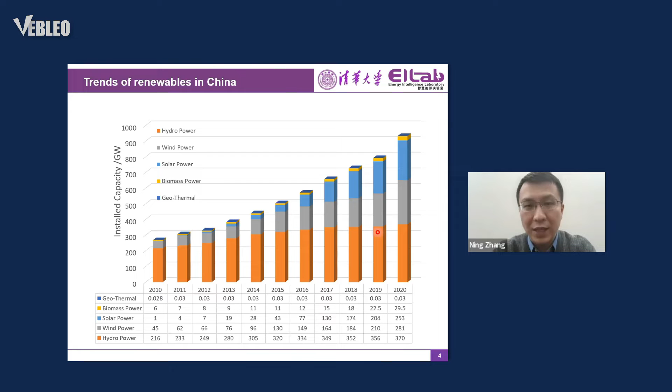And this is not the end. This is just the beginning of the development of renewable energy. We can see currently in China, about 1/3 of the electricity is produced by renewable energy. Among them, only 1/3 of the renewable energy is from wind power and solar. But this percentage will be increased to more than 45% by 2030, and to more than 70% in 2040. So the rapid growth in renewable energy brings a lot of challenges.

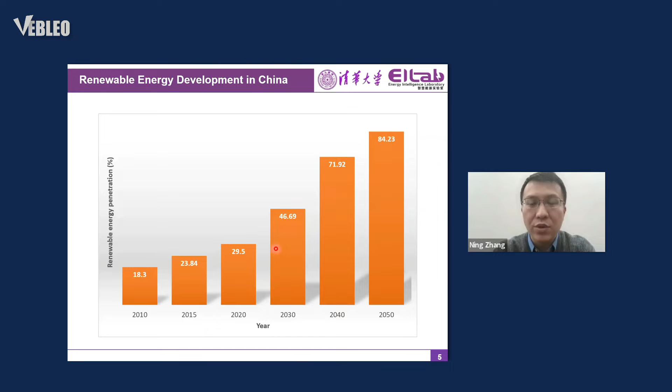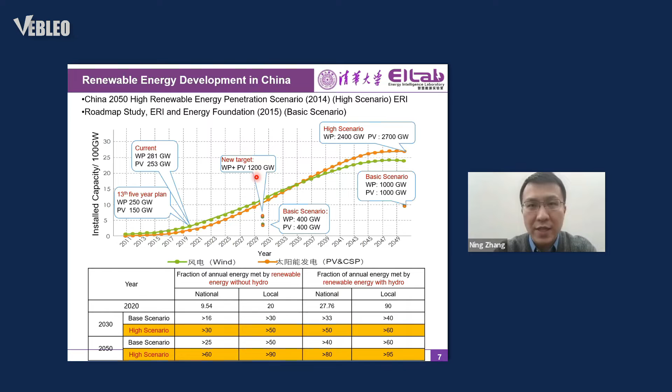We can also see from this figure that we are here now in 2021, and here is the development of wind power and solar, both of which are about 300 gigawatts. And the target is that wind power and PV will reach about 1,200 gigawatts by 2030. So this is a big challenge for the Chinese power system. For example, renewable energy is intermittent, and it also integrates to the power system via power electronic devices. So this is completely different from conventional generators such as thermal generators or hydro. So it brings a lot of challenges.

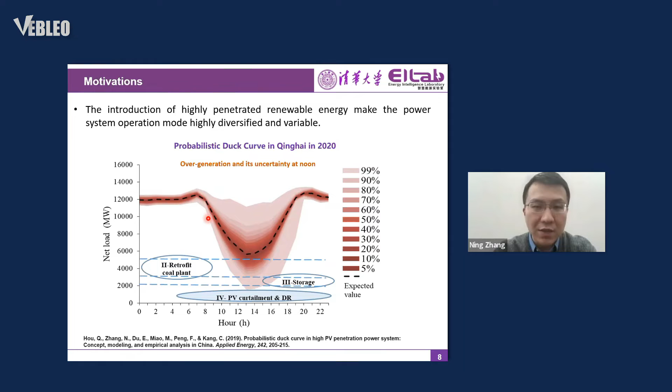We do not think hydro is a variable renewable energy because it is conventional and it is quite similar to thermal energy in terms of its technical characteristics: it is not variable, and it is not power electronic interfaced. So renewable energy here will only denote wind power and solar.

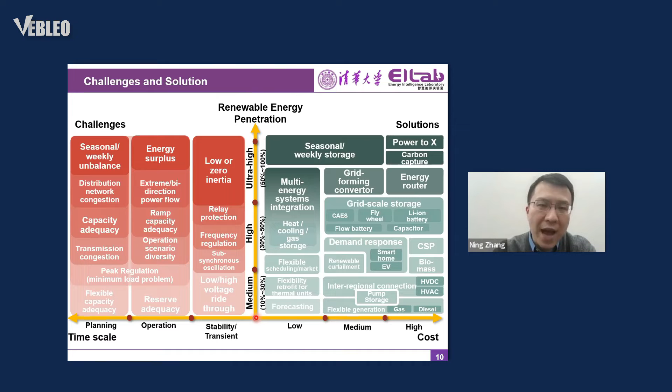And in the right half of the figure, we also categorize all of the technical solutions to integrate high penetration of renewable energy, including storage, demand response, multi-energy systems, or even power-to-X and carbon capture technology. All these technologies are also categorized into different stages and in terms of cost, because different technologies have different costs. And we find out that there's not a one-to-one map of which challenges can be tackled by which solutions, but the mapping is really, really complex.

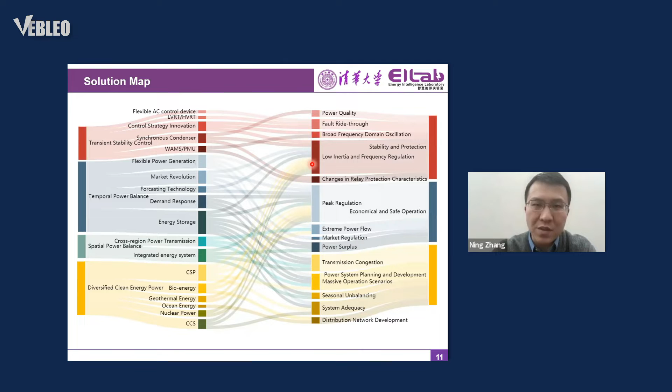We can see from this figure that we have a lot of solutions, and each solution does not have a single map to the challenges. For example, energy storage can solve multiple challenges. So how to decide the future shape of the power system under high penetration renewable energy is really a complex task. Today, I will share some research outcomes from our group about how to plan the future power system under renewable energy integration.

So first, I will introduce the power system operation simulation technique. In traditional power system planning, we only need to consider the typical power system operation modes, meaning the power system on summer days or winter days. When we plan the power system, we only need to consider its operation under extreme days. However, renewable energy is variable, so it varies a lot. Under this situation, we need a day-by-day simulation of the future power system, and then the power system planning can be assessed in detail.

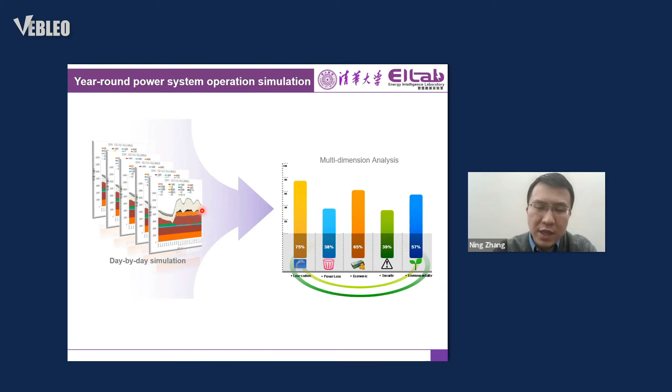So the detailed framework is that the power system simulation framework, the year-round simulation, has three stages. First is renewable energy operation simulation. That is to say, to simulate the renewable energy output of different wind farms and different solar farms, and then we simulate the whole year, for example, the 8,760 hours per year. And then we simulate the power system under such output of renewable energy.

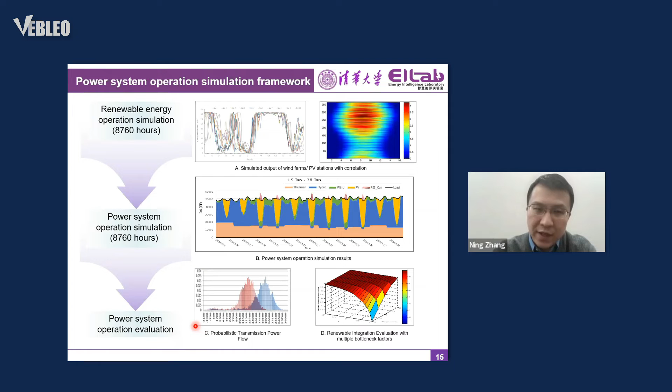That means we schedule the power system to see how it would operate under different output of renewable energy. Then we get day-by-day operation of the power system, and we evaluate how the power system operation acts, for example, the security, air pollution, the fuel it costs, and the money it costs. So we can evaluate the power system in various aspects and have a scientific comparison between different planning schemes.

So this is the typical outcome of a power system operation simulation. This is an example of the power system in Inner Mongolia in China, about two weeks of operation. Here, the black line denotes the load of electricity, the orange one denotes the operation of CHP generation, and the purple one denotes the thermal generation. Because this province is dominated by wind power, there's a lot of wind power here.

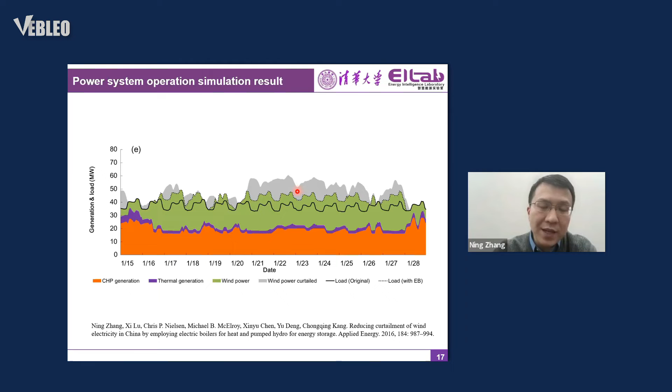The green line beyond this power load curve is the wind power that can be used for electric heating, that means space heating, because Inner Mongolia is in the north and needs heating in the winter. And the grey one means the wind power that needs to be curtailed in this time period. Wind power has intermittency: some days in a week are very windy, but sometimes the wind is not that much. So sometimes wind power has to be curtailed because the power system does not have enough flexibility. The power system needs more flexibility, like storage, to help accommodate renewable energy.

We have developed an optimal planning tool for power systems. It is a self-developed power system planning, decision-making, and evaluation platform, which can simulate the power system operation day by day. This platform has been applied in China's power system for a lot of provinces. Today I will take two examples of the application. One example is the interconnection between northwestern China and southwestern China, because northwestern China has a lot of wind and solar, but southwestern China, including Tibet, has a lot of hydro.

This is the generation mix of northwest China and southwest China. Northwest China has a lot of PV and wind, but really small hydro, so it has a lot of curtailment and lacks flexibility. In southwest China there's a lot of hydro and a lot of flexibility, but a lot of seasonal imbalance. That means the hydro in the summer or autumn season has a lot of power that needs to be curtailed, but in spring and winter the hydropower is insufficient.

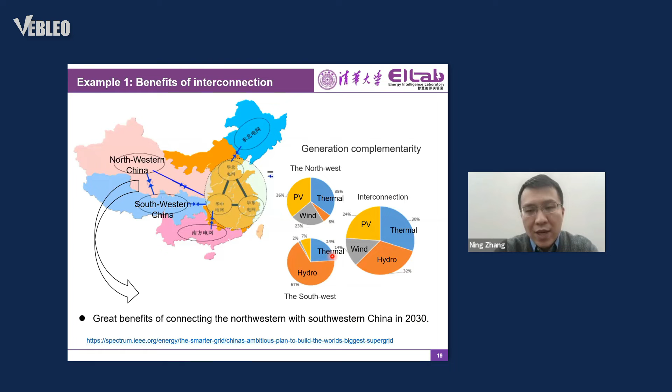So what is the benefit of integrating northwest China and southwest China? When they are interconnected, the generation mix is much more balanced. So we use this tool to calculate the benefit of interconnection, that is, how much renewable energy curtailment can be reduced. The result is very interesting: renewable energy curtailment would be largely reduced when interconnecting northwestern and southwestern China. The curtailment rate will reduce from 8 to less than 1%.

Also, this platform can calculate in detail how much capacity we need to interconnect southwestern and northwestern China. The result is we need to build transmission lines with a capacity of 90 gigawatts. That is the most cost-efficient way of interconnecting northwestern and southwestern China, because beyond that, the benefit would be really marginal.

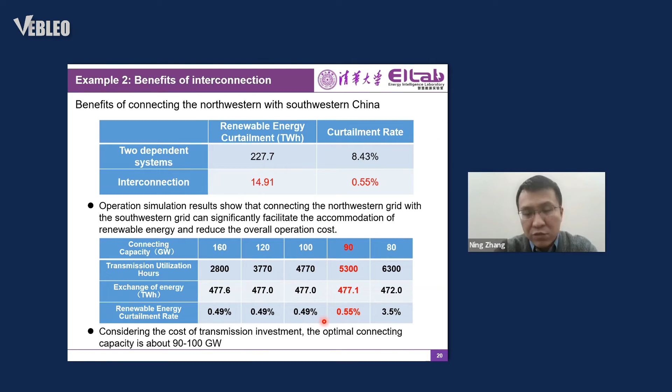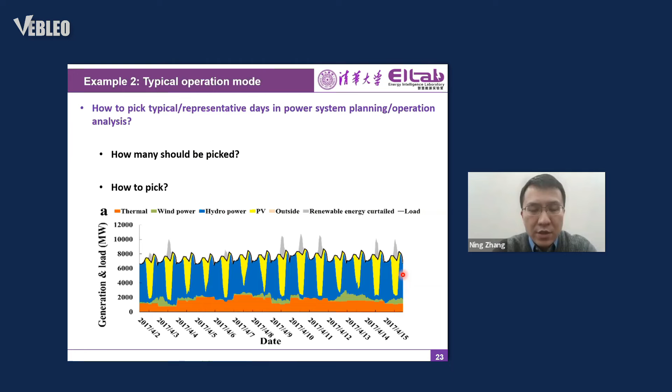The second example is how to identify the typical and representative days in power system planning. We use the power system operation simulation tool to do a big data analysis. This is the procedure. I will not go into detail, but I will show you some interesting results. We run power system simulations for different penetrations of renewable energy, 20%, 33%, and 40%. So this is the operating result.

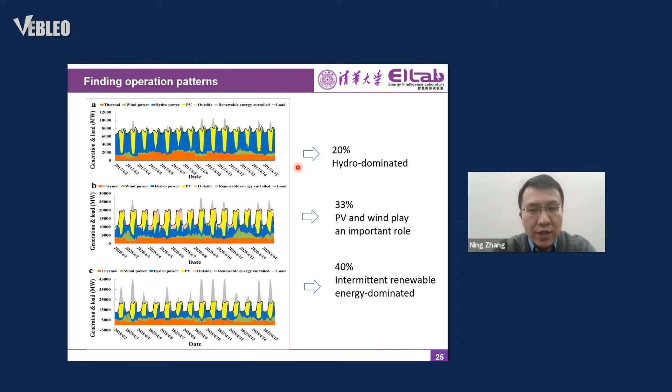Then we take this to a big data analytics platform and analyze the different days in the power system, how it operates, and how close they look to each other. And this is the result. It shows that when integrating a really small amount of renewable energy, the operating days are really similar, because the days are dominated by the hydro and also by the typical load.

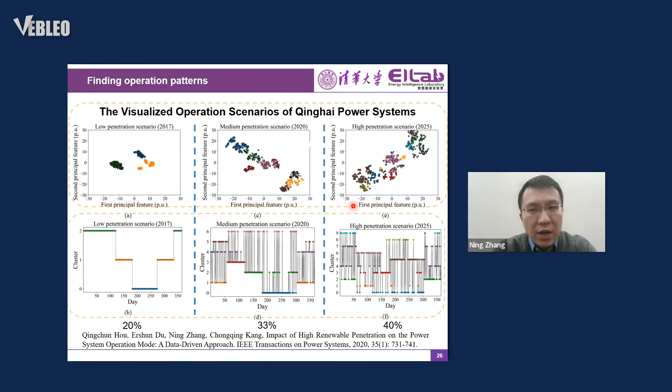But if we integrate more renewable energy, the days become dispersed. That means there's more diversity in different days. For example, in each season, we have 3 typical days instead of 1. If we integrate them more, for example, we integrate them at 40%, the days become more diverse. That means under high penetration of renewable energy, we need a lot more typical days than the traditional one. So these are just 2 examples.

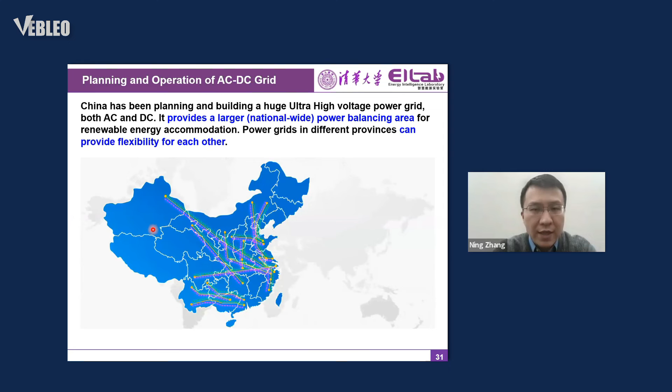Next, I will introduce generation, transmission, storage, and load integrated planning. We also developed a platform to do the long-term planning of the power system. So this is the typical power system interconnection in China. And in the future power system, when we integrate more renewable energy, what will the China power system look like? This is the question that we need to address.

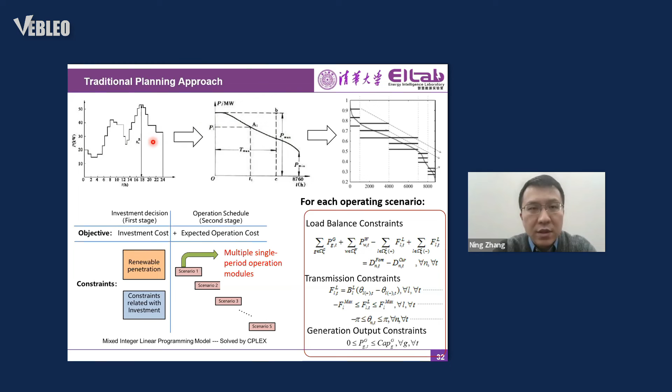In a traditional planning approach, we use the power curve like this. This is the duration curve, but this curve ignores the time sequence of the power load. But when we have renewable energy integration, we need to take into consideration the time sequence of the power load. That means we need to incorporate the panorama hourly operating simulation in power system planning.

So this is really hard work because this panorama hourly operation simulation is really, really hard, and it involves a lot of variables. And how to integrate this operation into the power system planning model is really hard. We figured out some solutions for calculation. For example, from the spatial scale, we aggregate different generation units into clusters to reduce the variables. And from the temporal scale, we aggregate different time series to make the calculation more efficient.

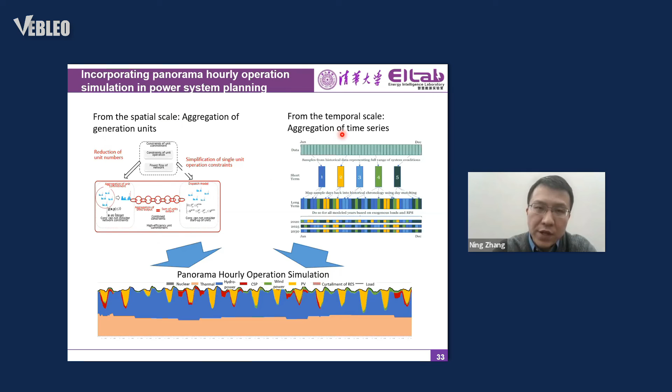And this is the overall model of generation, transmission, storage, load co-planning formulation. I will not go into detail about this model. I would like to share some results. The first is China's power system planning towards carbon neutrality. Now, we have some conclusions. The energy penetration rate of renewables, such as, sorry for that.

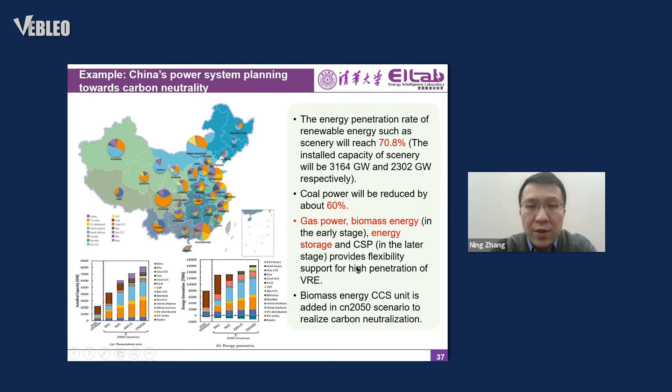So this figure shows the generation mix of different provinces in China towards the 2050 targets, that means the carbon neutrality targets. And renewable energy will reach 70% by 2050. That means 3,000 gigawatts of solar and 2,000 gigawatts of wind. And coal power will be reduced by about 60%. And gas power, biomass, energy storage, and CSP will provide flexibility to the variable renewable energy.

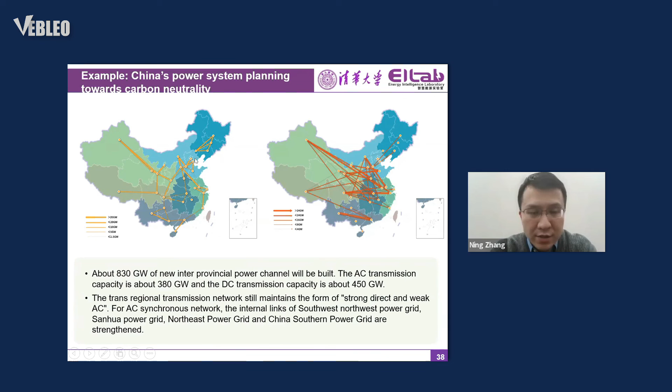And we can also see from the results about the transmission lines that about 830 gigawatts of new interprovincial power channels will be built, both AC and DC. AC and DC is half and half, but DC will still be stronger and more direct than AC, and this is the grid pattern of China in 2050. And we can also see the interprovincial exchange of China's power system.

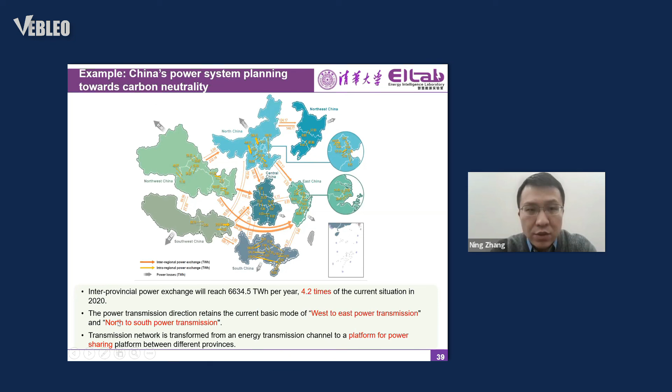The power exchange will reach about 6,000 terawatt hours per year. That means it is 4 times the current situation in 2020. Though in 2050 load and renewable generation do not reach 4 times, it's only about 2 times, the interconnection will reach 4 times. That means when we deliver 1 megawatt of energy, it needs more energy transmission in the future. And the energy flow in China will also keep the west to east power transmission and the north to south power transmission.

So this is the basic idea of what I shared today, and I will draw some conclusions. The conclusion is that high penetration of renewable energy will pose an increasing bundle of challenges. Various technologies are able to tackle these challenges, but the overall structure of the future power system will depend on the relative cost effectiveness of these technologies. And the power system will change when the penetration of renewable energy is higher than 20% to 30%.

And year-round operation simulation is required for power system planning. And the planning of generation, transmission, storage, and load should be coordinated under high penetration of renewable energy. They cannot be done one by one. They need to be coordinated. And the above requirements need new modeling and computational approaches.

And there are a lot of issues to be further addressed, which include efficient operation planning methods, market design, stability analysis, the new generation of accurate forecasting of renewable energy, and grid scale storage, such as power to hydrogen. So in the future power system, there are a lot of challenges, and in the planning stage, we have some preliminary work, and I would like to share this work with you.